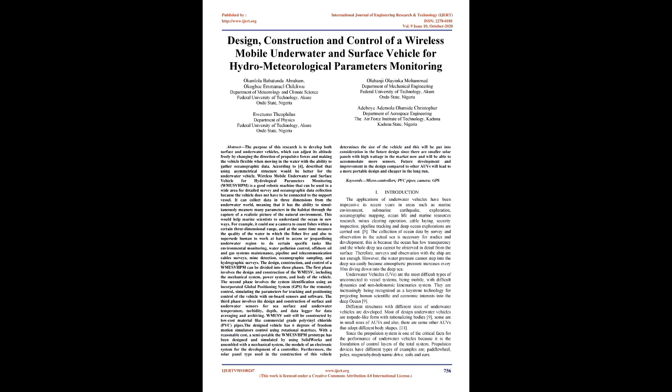The design, construction, and control of a WMUSV can be divided into 3 phases. The first phase involves the design and construction of the WMUSV, including the mechanical system, power system, and body of the vehicle. The second phase involves the system identification using an incorporated global positioning system, GPS, for the remote control, simulating the parameters for tracking and positioning control of the vehicle with onboard sensors and software. The third phase involves the design and construction of surface and underwater sensors for sea surface and underwater temperature, turbidity, depth, and data logger for data averaging and archiving.

The WMUSV unit will be constructed by low-cost material like commercial-grade polyvinyl chloride, PVC, pipes. The designed vehicle has 6 degrees of freedom motion simulators control using rotational matrices. With a reasonable cost, a semi-portable WMUSV prototype has been designed and simulated by using SolidWorks and assembled with a mechanical system, the module of an electronic system for the development of a controller.

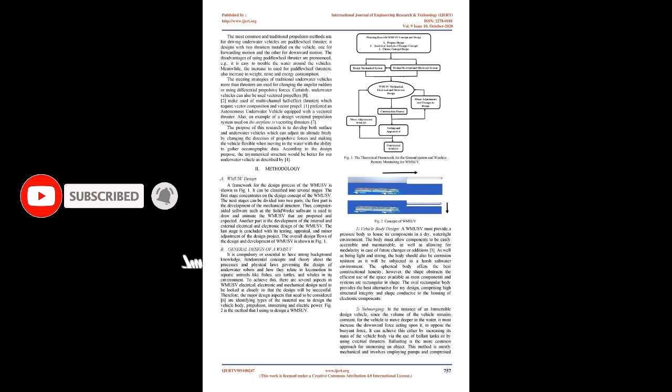Furthermore, the solar panel type used in the construction of this vehicle determines the size of the vehicle, and this will be put into consideration in the future design since there are smaller solar panels with high wattage in the market now and will be able to accommodate more sensors. Future development and improvement in the design compared to other AUVs will lead to a more portable design and cheaper in the long run. Keywords: microcontrollers, PVC pipes, camera, GPS.

Introduction. The applications of underwater vehicles have been impressive in recent years in areas such as marine environment, submarine earthquake, exploration, oceanographic mapping, ocean life and marine resources research, mines clearing operation, cable laying, security inspection, pipeline tracking and deep ocean explorations. 5. The collection of ocean data by survey and observation in the actual sea is necessary for studies and development. This is because the ocean has low transparency and the whole deep sea cannot be observed in detail from the surface. Therefore, surveys and observation with the ship are not enough.

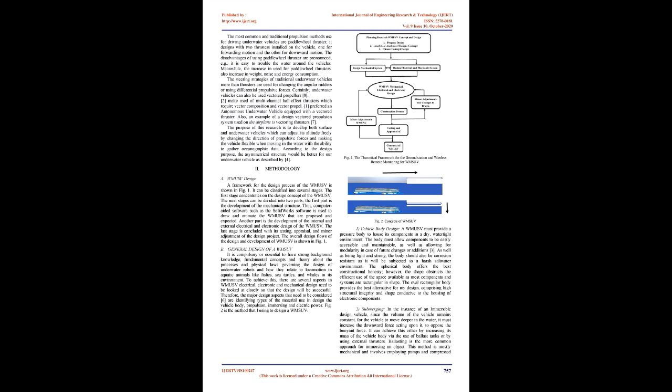However, humans cannot step into the deep sea easily because the water pressure increases every 10 meters diving down into the deep sea. Underwater vehicles, UVs, are the most difficult types of systems unconnected to vessels, being mobile, with difficult dynamics and non-holonomic kinematics. They are increasingly being recognized as a keystone technology for projecting human scientific and economic interests into the deep ocean.

9. Different structures with different sizes of underwater vehicles are developed. Most designed underwater vehicles are torpedo-like form with streamlined bodies. 9. Some are small AUVs, and there are some other AUVs that adopt different body shapes. 11. The propulsion system is one of the critical factors for the performance of underwater vehicles because it is the foundation of control layers of the total system.

Propulsion devices have different types; examples are paddle wheel, poles, magneto-hydrodynamic drive, sails and oars. The most common and traditional propulsion method used for driving underwater vehicles is the paddle wheel thruster. It is designed with 2 thrusters installed on the vehicle, one for forward motion and the other for downward motion. The disadvantages of using paddle wheel thrusters are pronounced, e.g., it is easy to disturb the water around the vehicles.

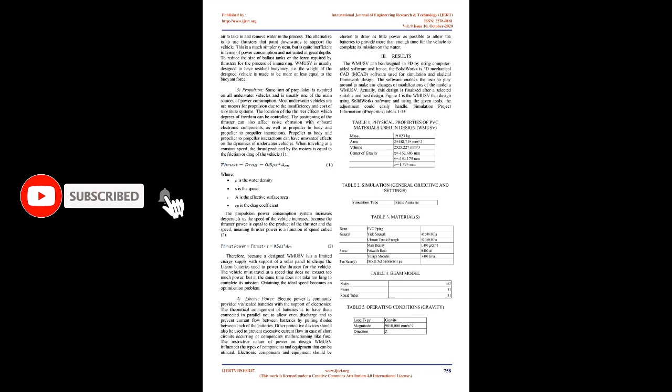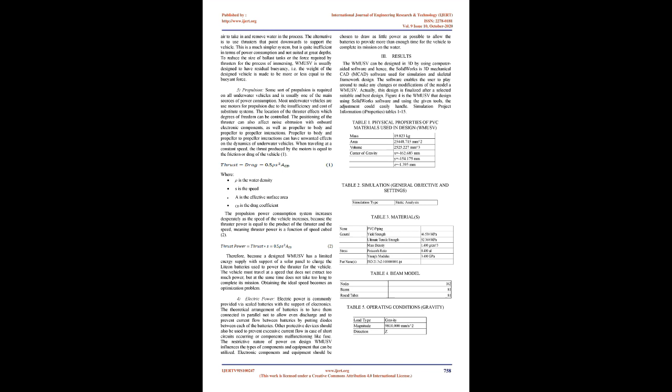Meanwhile, the increase in use of paddle wheel thrusters also increases weight, noise, and energy consumption. The steering strategies of traditional underwater vehicles with thrusters are changing the angle of rudders or using differential propulsive forces. Certainly, underwater vehicles can also use vectored propellers. Some make use of multi-channel Hall effect thrusters, which require vector composition and vector propulsion. One preferred an autonomous underwater vehicle equipped with a vectored thruster. Also, an example of a vectored propulsion system design used on airplanes is vectoring thrusters.

The purpose of this research is to develop both surface and underwater vehicles which can adjust their altitude freely by changing the direction of propulsive forces, making the vehicle flexible when moving in the water with the ability to gather oceanographic data. According to the design purpose, the asymmetrical structure would be better for our underwater vehicle, as described by reference 4. 2. Methodology.

WMUSV design. A framework for the design process of the WMUSV is shown in Fig. 1. It can be classified into several stages. The first stage concentrates on the design concept of the WMUSV. The next stages can be divided into 2 parts. The first part is the development of the mechanical structure. Thus, computer-aided software such as SolidWorks is used to draw and animate the proposed and expected WMUSV. Another part is the development of the internal and external electrical and electronic design of the WMUSV. The last stage concludes with testing, appraisal, and minor adjustment of the design project.

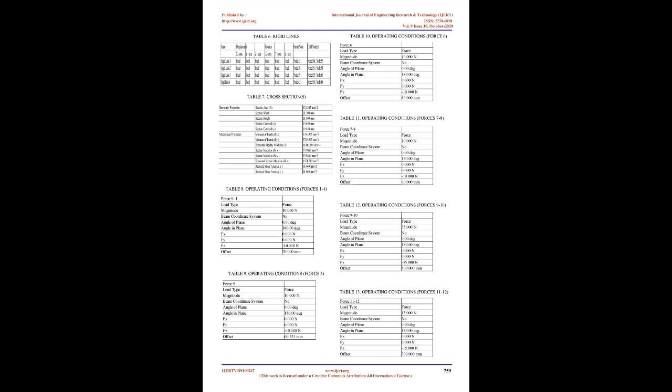The overall design flow of the design and development of the WMUSV is shown in Fig. 1. B. General design of WMUSV. It is essential to have strong background knowledge, fundamental concepts, and theory about the processes and physical laws governing the design of underwater robots and how they relate to locomotion in aquatic animals like fishes, sea turtles, and whales in their environment. To achieve this, several aspects of the WMUSV, electrical, electronic, and mechanical design, need to be looked at closely so that the design will be successful. Therefore, the major design aspects that need to be considered are identifying the types of material used in designing the vehicle body, propulsion, submerging, and electric power. Fig. 2 is the method that I am using to design a WMUSV.

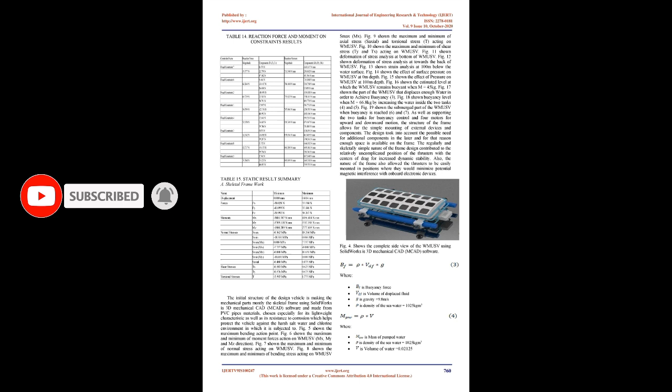1. Vehicle body design. A WMUSV must provide a pressure body to house its components in a dry, watertight environment. The body must allow components to be easily accessible and maintainable, as well as allowing for modularity in case of future changes or additions. As well as being light and strong, the body should also be corrosion resistant, as it will be subjected to a harsh saltwater environment. The spherical body offers the best structural integrity; however, the shape obstructs the efficient use of the available space, as most components and systems are rectangular in shape. The oval rectangular body provides the best alternative for my design, combining high structural integrity and a shape conducive to housing electronic components.

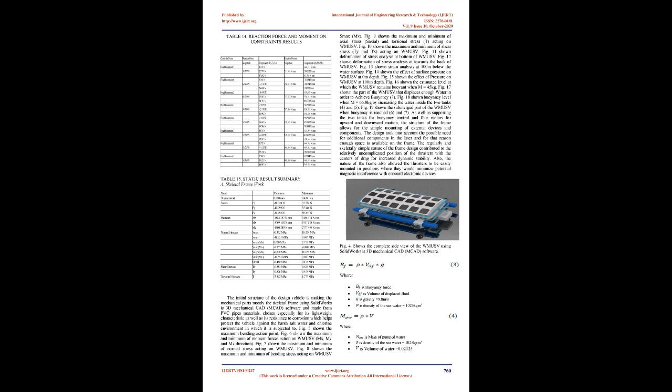2. Submerging. In the instance of a submersible vehicle, since the volume of the vehicle remains constant, for the vehicle to move deeper in the water, it must increase the downward force acting upon it to oppose the buoyant force. It can achieve this either by increasing the mass of the vehicle body via ballast tanks or by using external thrusters. Ballasting is the more common approach for submerging an object. This method is mostly mechanical and involves employing pumps and compressed air to take in and remove water. The alternative is to use thrusters that point downwards. This is a much simpler system, but is quite inefficient in terms of power consumption and not suited to great depths. To reduce the size of ballast tanks or the force required by thrusters, the WMUSV is usually designed to have neutral buoyancy, i.e. the weight of the vehicle is made more or less equal to the buoyant force.

3. Propulsion. Some sort of propulsion is required on all underwater vehicles and is usually one of the main sources of power consumption. Most underwater vehicles use motors for propulsion due to the inefficiency and cost of substitute systems. The location of the thruster affects which degrees of freedom can be controlled. The positioning of the thruster can also affect noise intrusion with onboard electronic components, as well as propeller-to-body and propeller-to-propeller interactions. These interactions can have unwanted effects on the dynamics of underwater vehicles.

When traveling at a constant speed, the thrust produced by the motors is equal to the friction or drag of the vehicle, where ρ is the water density, S is the speed, A is the effective surface area, and CD is the drag coefficient. The propulsion power consumption increases drastically as the speed of the vehicle increases, because the thruster power is equal to the product of the thrust and the speed, meaning thruster power is a function of speed cubed.

Therefore, because a designed WMUSV has a limited energy supply, with support of a solar panel to charge the lithium batteries used to power the thrusters, the vehicle must travel at a speed that does not extract too much power, but at the same time does not take too long to complete its mission. Obtaining the ideal speed becomes an optimization problem.

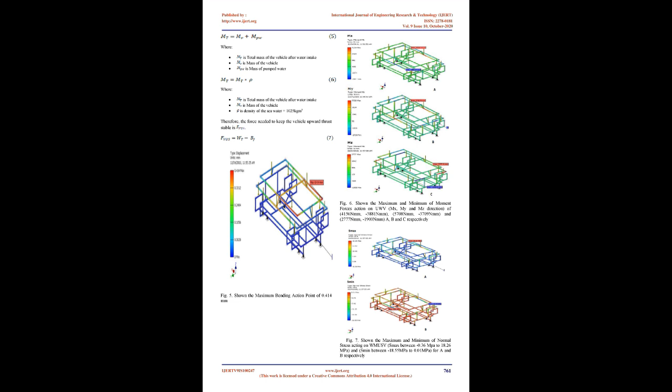Electric power. Electric power is commonly provided via sealed batteries with the support of electronics. The theoretical arrangement of batteries is to have them connected in parallel to allow even discharge and to prevent current flow between batteries by putting diodes between each of the batteries. Other protective devices, like fuses, should also be used to prevent excessive current flow in case of short circuits occurring or components malfunctioning.

The restrictive nature of power on the designed WMUSV influences the types of components and equipment that can be utilized. Electronic components and equipment should be chosen to draw as little power as possible to allow the batteries to provide more than enough time for the vehicle to complete its mission on the water.

Results. The WMUSV can be designed in 3D using computer-aided software, and hence SolidWorks, a 3D mechanical CAD (MCAD) software, is used for simulation and skeletal framework design. The software enables the user to make any changes or modifications to the model of the WMUSV. This design was finalized after selecting the most suitable design. Figure 4 is the WMUSV designed using SolidWorks, and using the given tools, adjustments could easily be handled. Simulation project information, properties, tables 1 to 15.

The initial structure of the designed vehicle consists of the mechanical parts, mostly the skeletal frame, made using SolidWorks 3D mechanical CAD software and made from PVC pipe materials, chosen especially for their lightweight characteristic as well as their resistance to corrosion, which helps protect the vehicle against the harsh salt water and chlorine environment to which it is subjected. Fig 5 shows the maximum bending action point. Fig 6 shows the maximum and minimum moment forces acting on the WMUSV in the MX, MY and MZ directions.

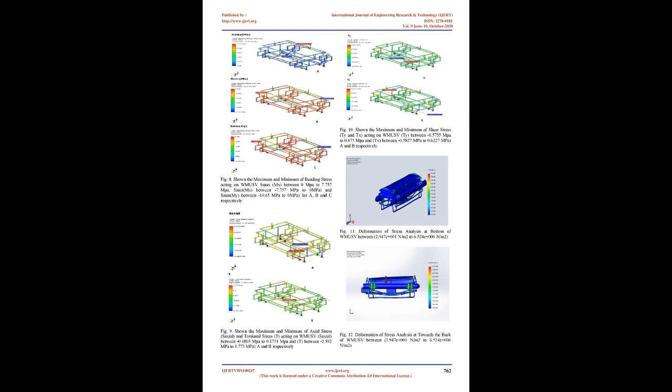Fig 7 shows the maximum and minimum normal stress acting on the WMUSV. Fig 8 shows the maximum and minimum bending stress acting on the WMUSV, max MX. Fig 9 shows the maximum and minimum axial stress, S axial, and torsional stress, T, acting on the WMUSV. Fig 10 shows the maximum and minimum shear stress, TY and TX, acting on the WMUSV. Fig 11 shows deformation from stress analysis at the bottom of the WMUSV. Fig 12 shows deformation from stress analysis towards the back of the WMUSV.

Fig 13 shows strain analysis at 100 m below the water surface. Fig 14 shows the effect of surface pressure on the WMUSV at 0 m depth. Fig 15 shows the effect of pressure on the WMUSV at 100 m depth. Fig 16 shows the estimated level at which the WMUSV remains buoyant when m equals 45 kg. Fig 17 shows the part of the WMUSV that displaces enough water to achieve buoyancy. Fig 18 shows the buoyancy level when m equals 66.8 kg by increasing the water inside the 2 tanks. Fig 19 shows the submerged part of the WMUSV when buoyancy is reached.

As well as supporting the 2 tanks for buoyancy control and 4 motors for upward and downward motion, the structure of the frame allows for the simple mounting of external devices and components. The design took into account the possible need for additional components later, and for that reason enough space is available on the frame. The regular and skeletally simple nature of the frame design contributed to the relatively uncomplicated positioning of the thrusters with the centers of drag for increased dynamic stability. Also, the nature of the frame allowed the thrusters to be easily mounted in positions where they would minimize potential magnetic interference with onboard electronic devices.

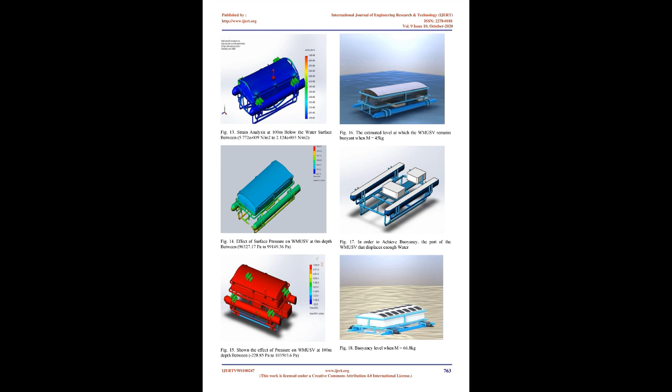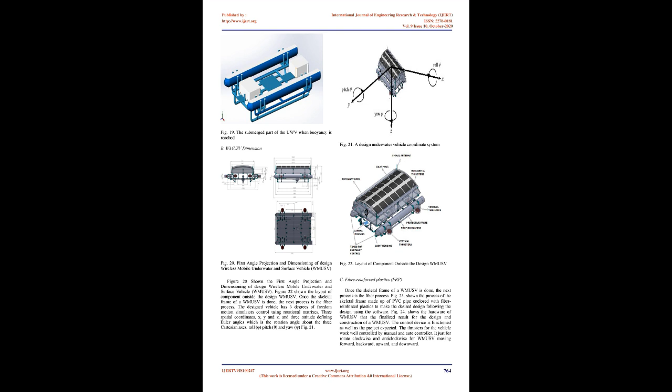4. Factors affecting WMUSV performances. The various forces that act on an underwater vehicle need to be considered for better performance. These include an increase in the mass of the vehicle, environmental factors, and water pressure. The pressure is another important factor for underwater vehicles that needs to be taken into deliberation in the design process. A. Increase in the mass.

The first phenomenon that affects underwater vehicles is the increase in the mass of the vehicle. When a body of the vehicle moves underwater, the immediate surrounding fluid speeds up along with the body of the vehicle. This affects the dynamics of the vehicle in such a way that the force required to speed up the water can be modeled as increasing the mass. Increase in the mass is a fairly significant effect and is related to the mass and inertial values of the designed underwater vehicle. B. Environmental forces.

Environmental disturbances can affect the motion and stability of a designed underwater vehicle. This is particularly true for an underwater vehicle where water turbulence, ocean waves, ocean currents, and even wind can upset the underwater vehicle. Especially when the vehicle is immersed, the effect of ocean wind and waves can be largely ignored. The most important upset then for underwater vehicles is ocean currents. Using the pool, we can control environmental forces and the effect of these environmental forces is minimal.

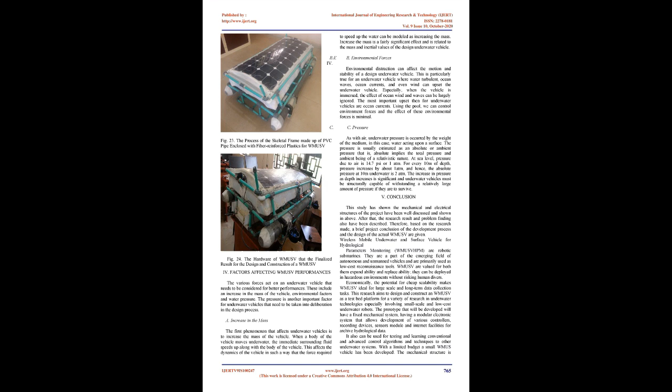C. Pressure. As with air, underwater pressure is caused by the weight of the medium, in this case water, acting upon a surface. The pressure is usually estimated as an absolute or ambient pressure, that is, absolute implies the total pressure and ambient being of a relative nature. At sea level, pressure due to air is 14.7 psi or 1 atm. For every 10 m of depth, pressure increases by about 1 atm, and hence the absolute pressure at 10 m underwater is 2 atm. The increase in pressure as depth increases is significant and underwater vehicles must be structurally capable of withstanding a relatively large amount of pressure if they are to survive.

V. Conclusion. This study has shown the mechanical and electrical structures of the project, which have been well discussed and shown above. After that, the research result and problem finding have also been described. Therefore, based on the research made, a brief project conclusion of the development process and the design of the actual WMUSV is given. Wireless mobile underwater and surface vehicles for hydrological parameters monitoring, WMUSVHPM, are robotic submarines. They are a part of the emerging field of autonomous and unmanned vehicles and are primarily used as low-cost reconnaissance tools. WMUSV are valued for both their expandability and replaceability.

They can be deployed in hazardous environments without risking human divers. Economically, the potential for cheap scalability makes WMUSV ideal for large-scale and long-term data collection tasks. This research aims to design and construct a WMUSV as a testbed platform for a variety of research in underwater technologies, especially involving small-scale and low-cost underwater robots. The prototype that will be developed will have a fixed mechanical system, having a modular electronic system that allows development of various controllers, recording devices, sensor modules, and internet facilities for archiving hydrological data.

It also can be used for testing and learning conventional and advanced control algorithms and techniques for other underwater systems. With a limited budget, a small WMUSV vehicle has been developed. The mechanical structure is produced. Future development and improvement would show that, compared to other autonomous and unmanned vehicle, AUV, projects, this smaller and cheaper concept will succeed.